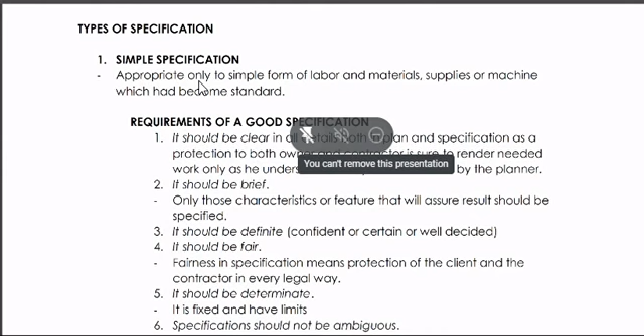Ng iyong foreman or ng contractor mo or ng owner mo. Okay? Next, it should be brief. Okay? Una, it should be clear. Pangalawa, it should be brief. Only those characteristics or features that will assure result should be specified. Hindi yung ang dami mong nilagay, pero iisa lang pala patutunguhan, ang dami mo pang nilagay, ang dami pang pasikot-sikot.

Next, number 3. It should be definite. Confident or certain or well-decided. Hindi yung pabago-bago ka. Like for example, during the process of pre-construction, which is when you say pre-construction, it is under the design. Kapag nasa design process pa lang, and then yung specification mo, nilagay mo doon, I like it white. Nilagay mo doon sa specification mo, white finish wall.

And then, during the construction, iniba mo na naman. It should be gray finish. And then, after tapos na yung project, ay, dapat pala talaga red na lang nilagay ko. So, it should not be like that. It should be definite. You should be confident or certain. Although there are things na nagbabago, but hindi yung to the point na every phase na lang ay nagpapalit ka. Because it takes time.

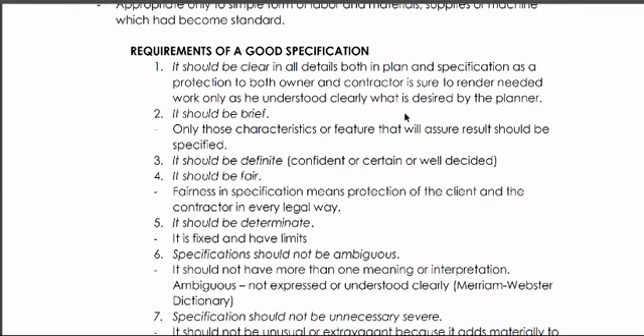specifications should not be ambiguous. Sabihin niyo lang kung medyo mabilis ako or mabilis ako. So, specifications should not be ambiguous. When you say ambiguous, sabi ni Merriam, ambiguous, this is not expressed or understood clearly. And with regards to a specification, it should not have more than one meaning or interpretation.

Like for example, ikaw as an engineer, or ikaw as the site engineer or the designer of the house. If you're familiar with the CAD, yung cloud. So, nakita ko to sa meme sa Facebook wherein yung cloud kasi na yun, there is a specified instruction about that, and nilalagay siya dun sa plan. Ngayon, during the construction, naglagay naman siya ng butas na hugis cloud dun sa building. And that is a no-no.

Dapat pareho kayo or nagkakaroon tayo dapat ng toolbox meeting. Toolbox meeting, ito yung tawag kapag nagmi-meeting, this is inside the construction. Dito sa place natin, hindi siya masyadong ginagawa. Meeting lang, and then sasabihin lang ni contractor or ni engineer kung ano gagawin mo. But in the other areas, pagdating sa Manila, pag yung malalaking building na yung pinatayo, nagkakaroon sila ng toolbox meeting every day.

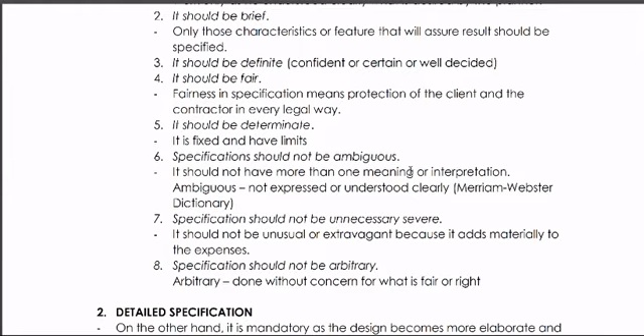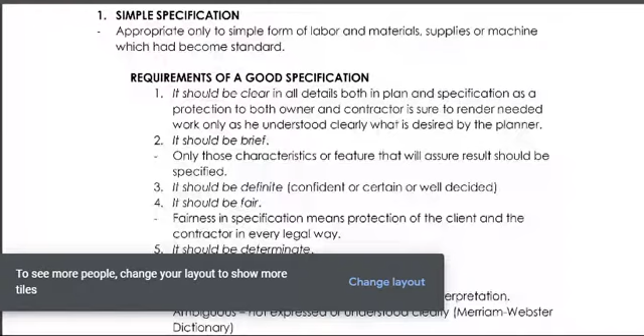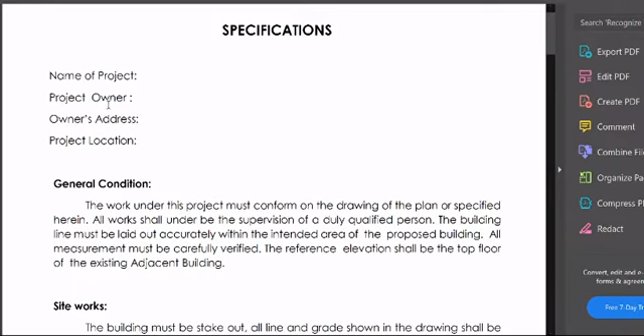I have here an example of simple specification. What is inside the simple specification? Of course, you must have the name of the project, the project owner, the owner's address, and the project location. Ito yung apat na nakalagay sa upper part ng specification mo.

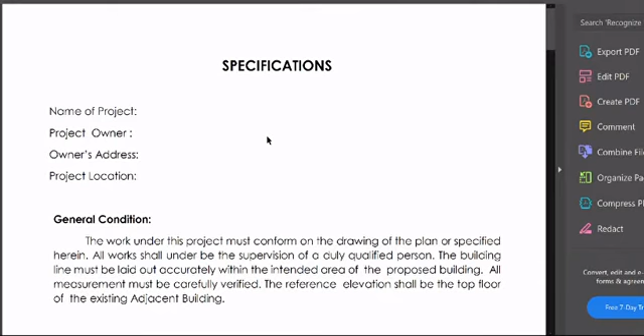Usually, pwede din itong nakalagay sa plano. Okay? But there are some designers who separate it. Okay? Para sa ganun, hindi nawawala. Okay? But there are some na nilalagay na mismo nila sa plano ito, sa gilid.

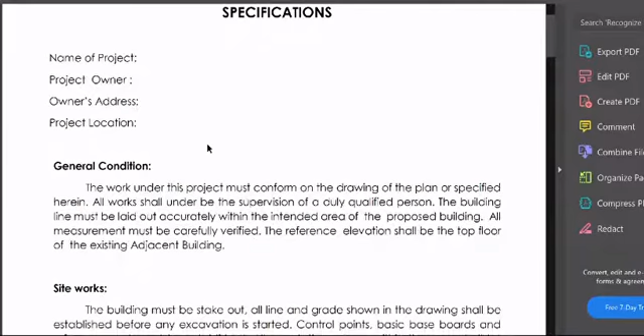Okay? Next, for the general condition, we have here, so ito lang yung mga laman ng simple specification natin, the name of the project, the project owner, the owner's address, and the project location. Number 1 na nakalagay doon, the general condition. When you see the general condition, it is the total or the summary of work done in the project.

Okay? So, for example, the general condition: the work under this project must conform to the drawing of the plan or as specified herein. All work shall be under the supervision of a duly qualified person. The building line must be laid out accurately within the intended area of the proposed building. All measurements must be carefully verified. The reference elevation shall be the top floor of the existing adjacent building.

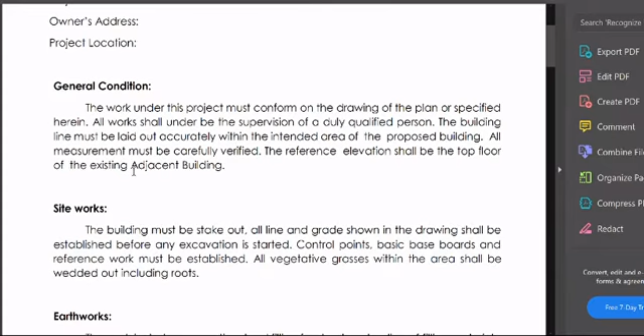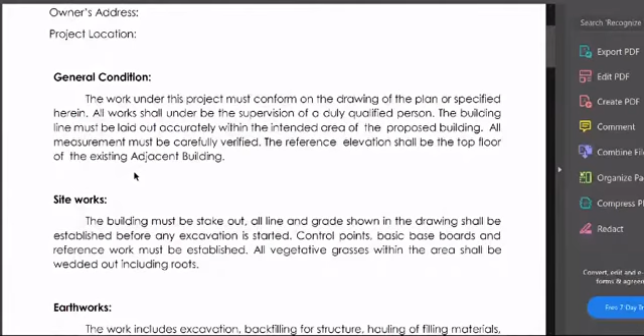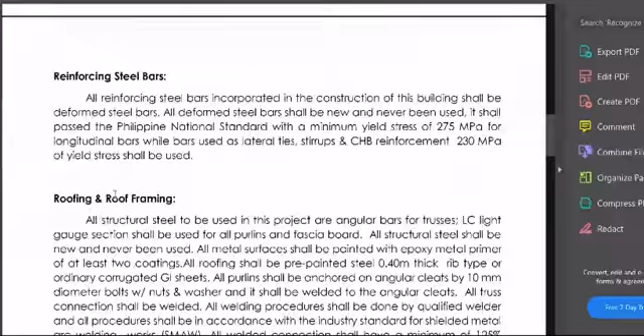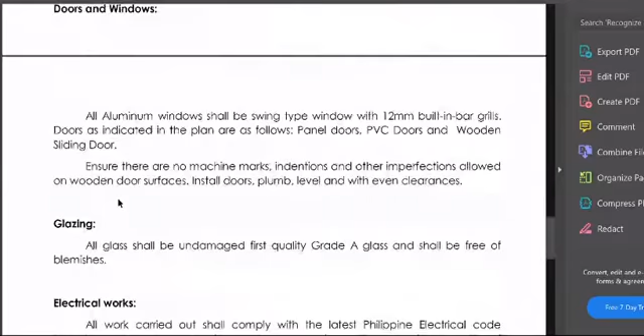Okay? So all in all, when you say general condition, this is the general or the summarized work that you have. And then, after the general condition, dito na yung nahahati. We have the site works, the earthworks, the concrete, okay, the reinforcing steel bars, the roofing and roof framing, the lumber and carpentry works, CHB laying, wall, column, beam, and floor finishes, doors and windows, glazing. When you say glazing, this is the glass, electrical works, and plumbing works.

And then under it, we have the... bakit ko hindi sinave yung aking.

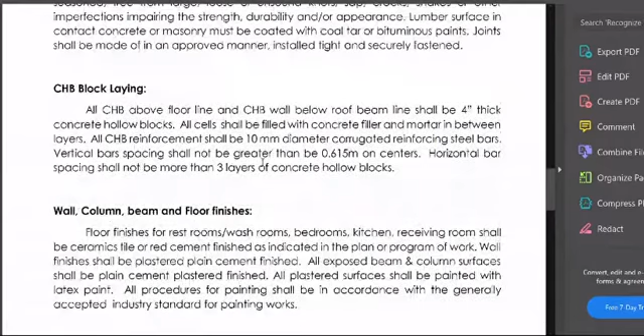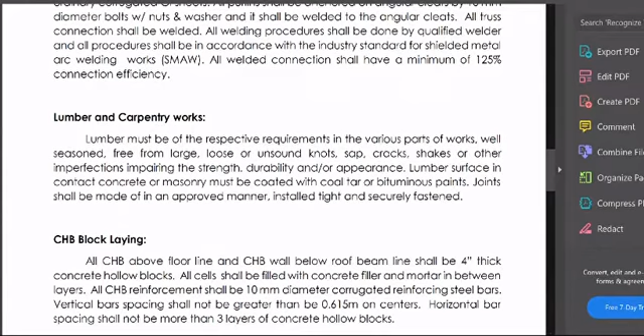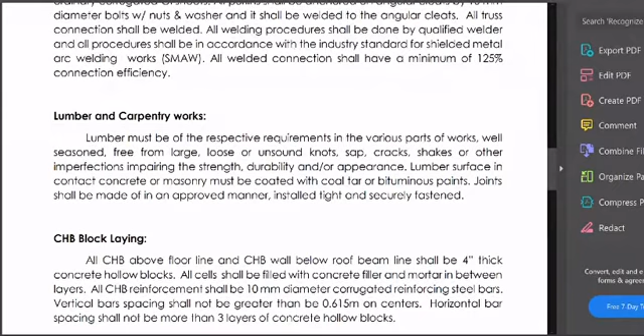Okay? Ano yun? Lag, oo. Yes po, ma'am. Lag ba? Wait lang. Naglalag pa rin ba? Hindi na, ma'am. Hindi na? Okay.

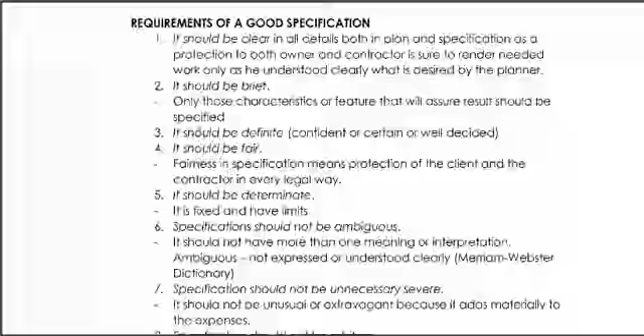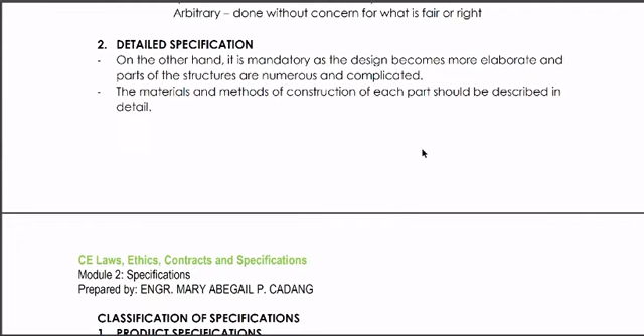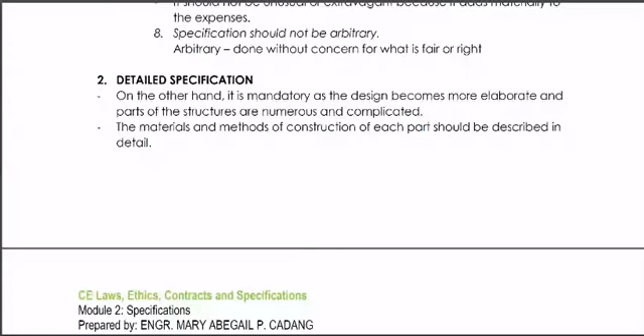So, proceed na tayo sa detailed specification. Okay? For the detailed specification, on the other hand, it is mandatory as the design becomes more elaborate and parts of the structure are numerous and complicated. Okay. Kung kanina, dun sa simple specification, this is more on the simple things that you need to do under the construction. But here in the detailed specification, this is more numerous and for the complicated part.

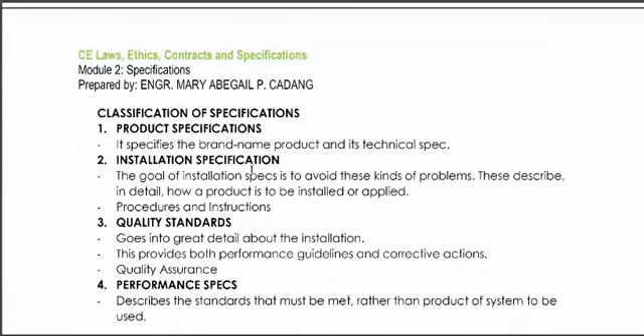Okay? So, ina-apply na siya for 2-story building, 3-story building, and more. And for those smart homes, ganyan. Okay? So, the materials and methods of construction of each part should be described in detail. Kaya nga siya tinawag na detailed specification. Now, for our specification, we have the classification of specifications. Okay? So, what are the classifications of specifications?

Number one, we have the product specifications. So, when you say product specification, it specifies the brand name product and its technical specification. Like for example, okay, the tile adhesive to be used is ABC. Okay, so naglalagay tayo ng mga brand name. Like for example, the cement to be used in the construction will all be... ano na yung mga brand ng semento ngayon? Basta yun. Okay? So, naglalagay tayo ng mga brand name.

Okay? Next, we have the installation specification. The goal of installation specs is to avoid this kind of problem. This describes in detail how a product is to be installed or applied. Installation specification is also the guidelines specification. Okay? This is more on the procedure and instruction specification. What are the things that we need to do on how to install a certain material or a certain part or a certain plan? Okay?

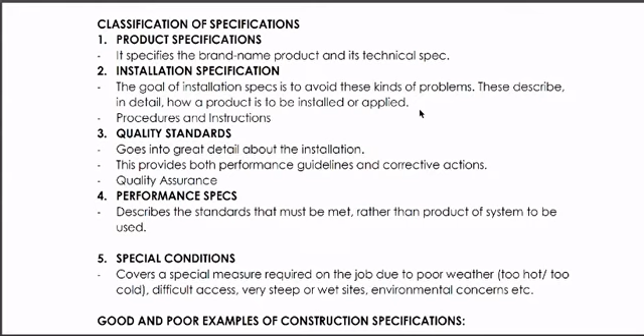Next, we have the quality standards. When you say quality standards, this goes into great detail about the installation. Okay? This is more on quality assurance. In order for us, as the engineer or as the designer, to ensure the quality of our product or our project, we have the quality standards. Like for example, the strength of the concrete is 21 MPa. Okay? So yung mga ganon. Quality standards indicate the strength of the concrete, the strength of the steel, and etc.

Okay? Next, we have the performance specs. When you say performance specs, this describes the standards that must be met rather than the product or system to be used. Okay? From the word itself, performance. What should be the performance of the product? Kumbaga, when you do or apply that certain specification, kung ano yung ini-expect mo na magiging performance nung certain thing or item of work na gagawin mo for that specification.

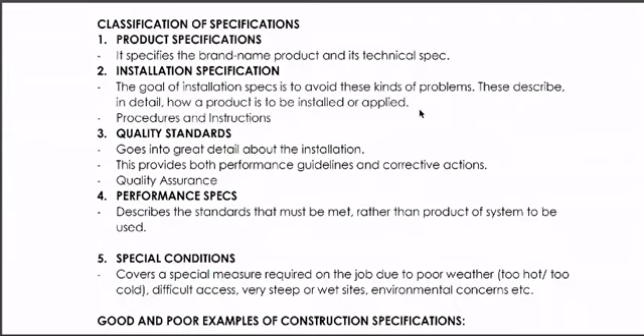Okay? Next, we have the special conditions. For the special conditions specifications, this covers a special measure required on the job due to poor weather. Whether it's too hot, too cold, difficult access, very steep sites, or wet sites, environmental concerns, etc. Pag sinabi mong special conditions, okay, this indicates about the weather. So, kumbaga, it gives us the special condition specification. This solves the problems.

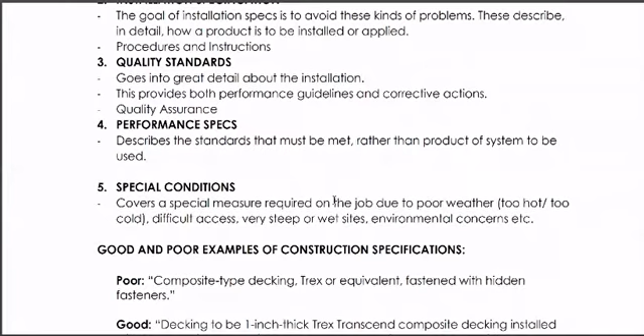So, like for example, merong condition dun sa site na hindi inaasahan. Like for example, yung pagtatayuan mo ng building mo ay dating wetlands. Kapag sinabi mong wetlands kasi, continuous yung water flow doon. When you say special condition specification, ano yung mga ipapaloob doon? Like for example, nasa wetland yung pagtatayuan ng building mo. For the special condition, we will use waterproofing for the foundation. So that is under the special condition specification.

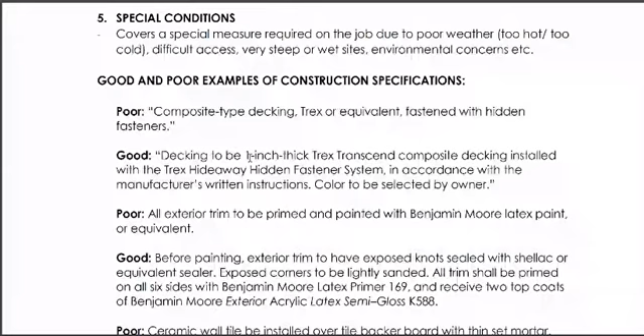Okay, now we have here the good and the bad or the poor examples of construction specifications. Example number 1. A poor construction specification goes like this: Composite type decking, Trex or equivalent, fastened with hidden fasteners. What is that? What do you mean composite type decking? What do you mean Trex or equivalent? What do you mean fastened with hidden fasteners? That is a poor type of construction specification because the guidelines or the instruction is not clear.

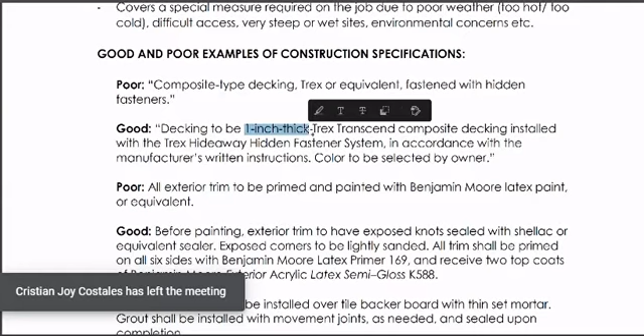But if we're going to rewrite it in a good construction specification, it goes like this: Decking to be 1-inch thick Trex Transcend composite decking installed with the Trex Hideaway hidden fastener system in accordance with the manufacturer's written instructions, color to be selected by the owner. Why is it under the good construction specification? Because as you can read, meron tayong number, meron kang color na makikita, meron kang instruction na makikita. So that indicates that your construction specification is good.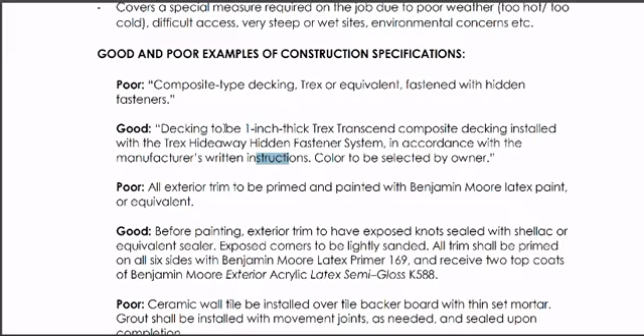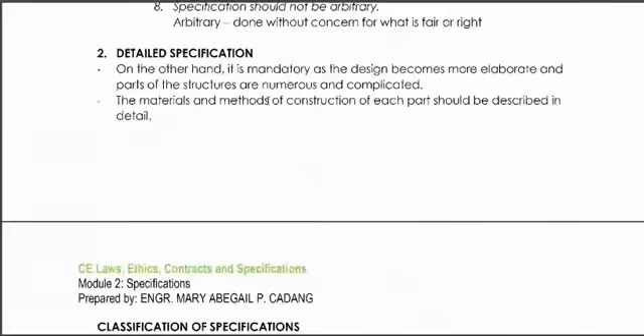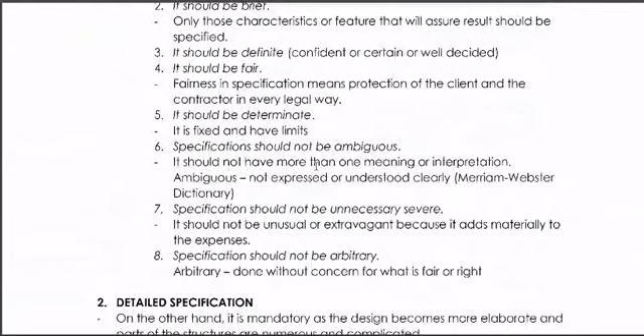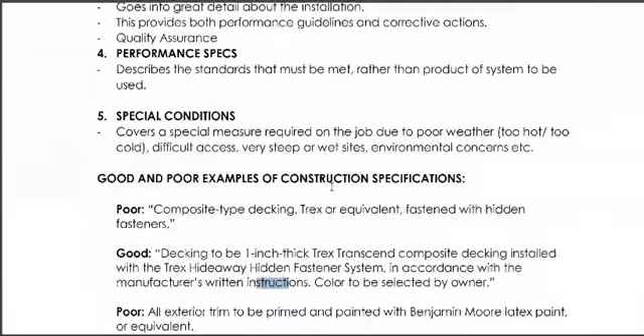Why? Because it is clear. It is, ano na tawag doon? Ano na yung una kanina? Clear. It is clear. It is brief. It is definite, fair, not ambiguous, and not unnecessarily severe, and not arbitrary. So that is the example of a poor and good construction specification. Sa mga iba, you just need to read na lang para mabilis tayo.

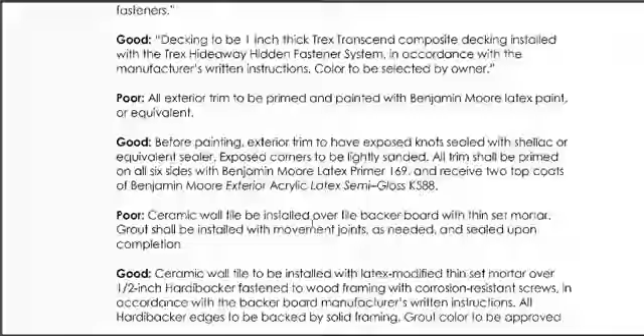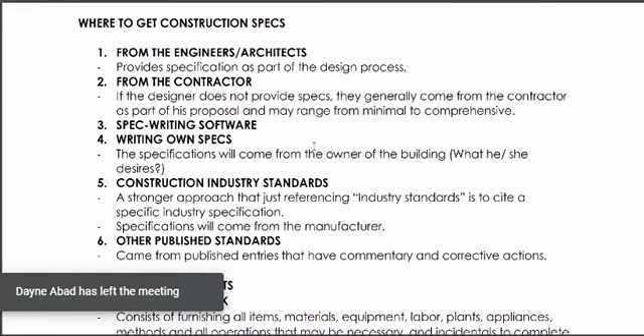Now, where to get construction specifications? Later on na lang yung sample natin for the detailed specifications. Number 1, of course, from the designer or from the engineer or architects. Why? Because they provide a specification as part of the design process. Una, syempre, kailangan galing siya kay designer. Hindi galing kay kapitbahay, hindi galing kay friendship, hindi galing kay internet. Dapat lagi kay designer, who is the engineer and the architect. Siya yung nakakaalam kung paano at anong gagawin sa project or dun sa plano.

Next, from the contractor, of course. But take note, if the designer does not provide specs, they generally come from the contractor as part of his proposal, ranging from minimal to comprehensive. Take note, class, the specification should always be from the designer or the engineers. Meron man tayong listahan dito kung saan natin pwedeng kunin yung specification, but the major source of specification should always be the designer. Like kay contractor, he or she can provide a specification, but it is for proposal only, and it should be approved by the designer.

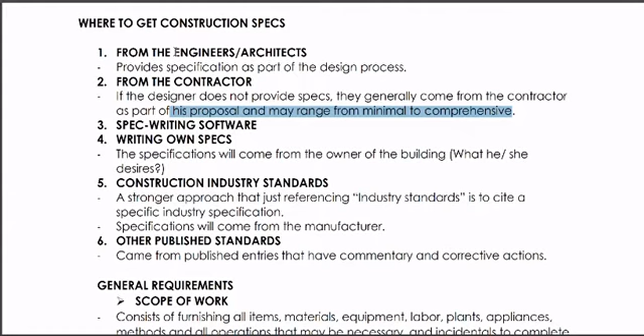So take note, the major specification should always come from the major specs source, who is the engineer or architect or the designer. Pwede mang magbigay si contractor, but still it is just a proposal, and dapat i-approve ni engineer or ni architect or the designer. Next, spec writing software. Meron tayong mga app or software na ginagamit in the construction industry for specification writing. But those things are still from the engineers and architects.

And it should always be approved by the engineers and architects. Usually, itong mga spec writing software na to, madalang naman siyang ginagamit sa atin. Pero, siguro sa mga first world country, or like for example, sa Dubai, okay? So, gumagamit sila nito. Or maybe sa Manila din, okay?

But, as an experienced engineer, I never had an experience regarding this spec writing software. Okay, so I have no knowledge about it, but I assure you that spec writing software gives also specification, but should always be approved by the designer.

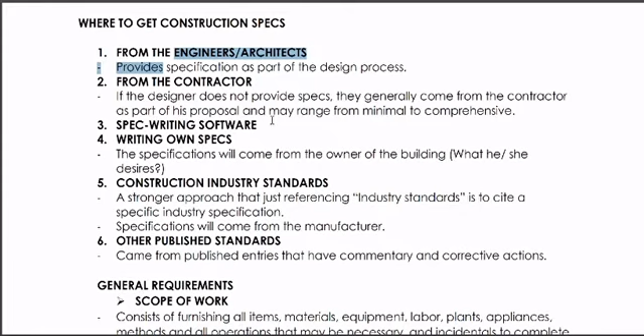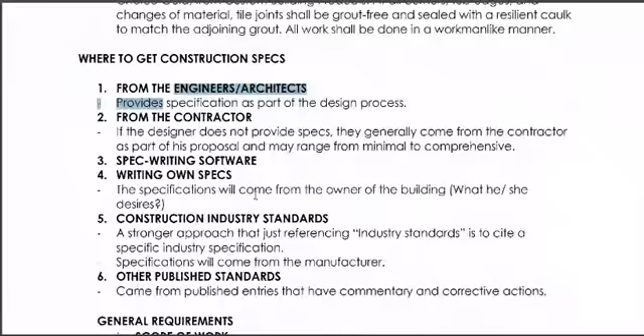Okay, next, we have the general requirements. So ito na yung mga laman ng ating detailed specification. Number 1, we have the general requirements. For the general requirements, this contains the scope of works. Kapag sinabi mong scope of works, this consists of furnishing all items, materials, equipment, labor, plants, appliances, methods, and all operations that may be necessary and incidentals to complete excavation, filling, backfilling, and grading in accordance with the plans and schedule if any, and subject to the terms and conditions of the contract.

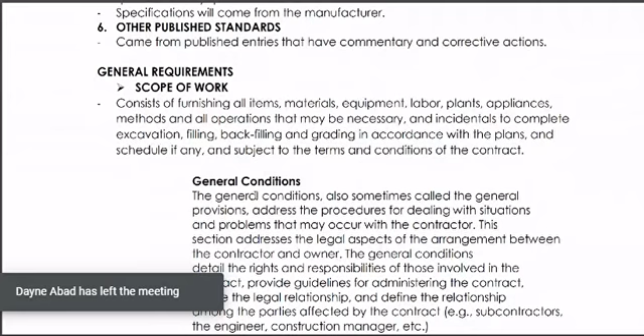What's within the scope of work? It contains the guidelines, what are the things to do, what are the description of works, and lastly, this also contains the contract. On how many days that you're going to construct. Take note, class, another information. In the construction industry, magkaiba ang calendar days at working days. When you say calendar days, it pertains from Monday to Sunday. That's straight week. We call that calendar days.

So, pag sa mga contract, later on, kapag nag-OJT na kayo, malalaman nyo yun. So, kapag sinabing calendar days, ibig sabihin non-stop yan. With or without weekends, with or without holidays, hindi kino-consider. Pag sinabi mo calendar days, that pertains from Monday to Sunday. Ibig sabihin straight week kang nagtatrabaho, umaga man o gabi.

Pag sinabi mo namang working days, that is from Monday to Friday, or Monday to Saturday. So, later on, pag naging engineer na kayo, tapos nag-review kayo ng mga contracts nyo, this is the timeline of the project within 24 calendar days. Pag sinabi niyan 24 calendar days, ibig sabihin straight yon, kahit na may natamaan na holiday or what, it is not considered.

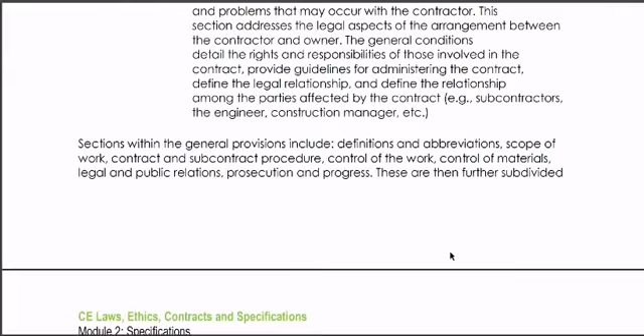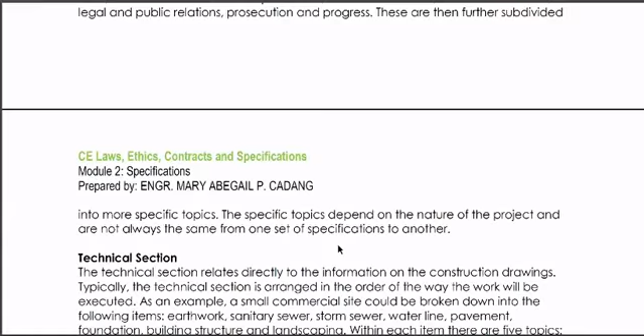Sections within the general provision include the definition and abbreviations, scope, subcontract procedure, control of the work, control of the materials, legal and public relations, prosecution and progress. These are further subdivided into more specific topics. The specific topics depend on the nature of the project and are not always the same from one set of specification to another. Okay? Now, we have the general condition, the scope of work.

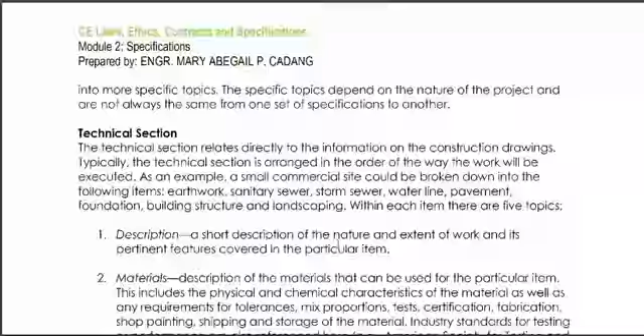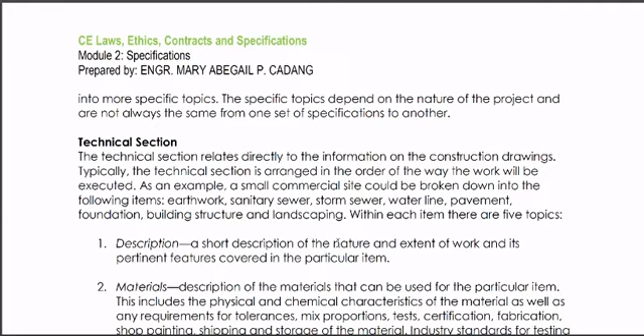Next, we have the... kung kanina dun sa general provision, this contains the summary, the item of works, the contracts, the guidelines, the conditions, the rules and regulation under the construction. Here in the technical section, this gives us the description or the detailed specification for every item of work. And what are the things na makikita mo every item of work?

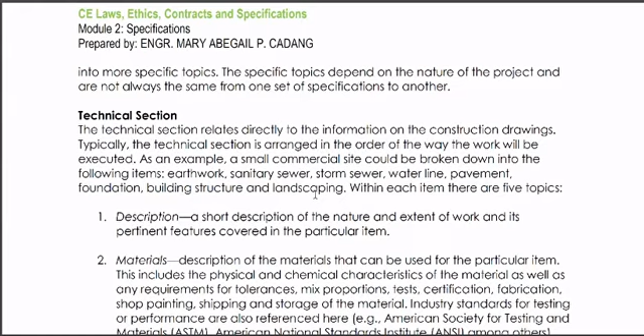The technical section relates directly to the information on the construction drawings. Typically, the technical section is arranged in order of the way the work will be executed. As an example, a small commercial site could be broken down into the following items. We have the earthwork, sanitary sewer, storm sewer, water line, pavement foundation, building structure, and landscaping. Within each item, there are 5 topics. So, take note, each item.

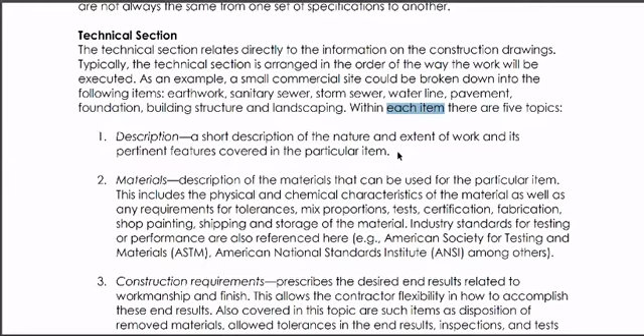Pag sinabi mo each item, that means every item of work. Like for example, structural excavation, structural concrete works, steel reinforcement works, ganyan. And ano yung nakapaloob doon? For the specification, dapat meron kang description. Description, this is a short description of the nature and extent of work and its pertinent features covered in the particular item. Like for example, item 101, or item 111. Item 111, what is the description? Project work description. It is structural excavation. Ganyan.

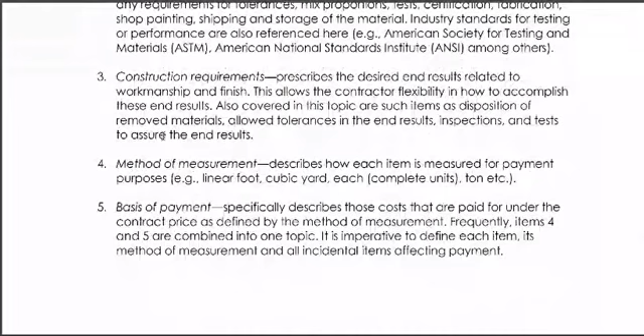Next, for that certain work, of course, what are the materials needed? Next, what are the construction requirements? What are the methods of measurement? So, alam niyo naman na siguro yung mga yan. And, lastly, what is the basis of payment? Pag sinabi mong basis of payment, this specifically describes those costs that are paid for under the contract price as defined by the method of measurement.

Pagdating sa basis of payment kasi, the basis of payment for construction ay hindi per kung ilang material yung nabayaran ay yung nagamit mo or ilan yung tao mo at that day, but the basis of payment under the construction industry is how much materials or how much work that you put or how much effort that you put on that project.

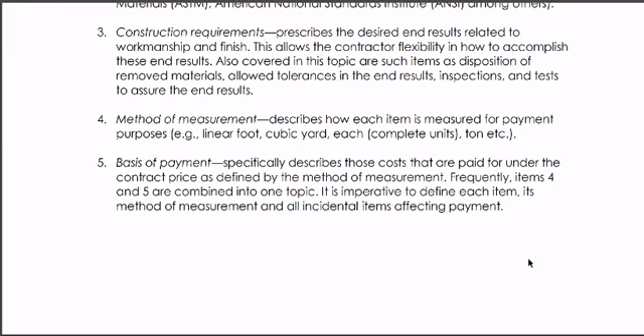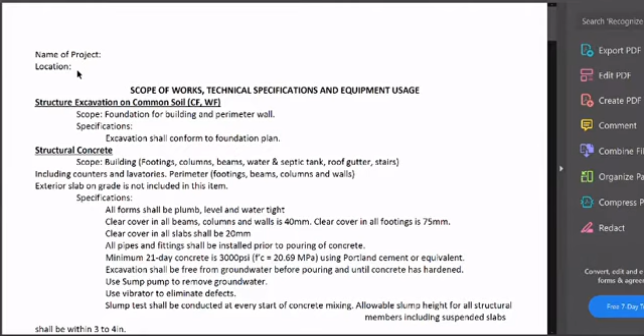So, this is an example of a detailed specification. Of course, we have the name of the project and the location. Meron din, may hindi pa ako naisali dyan, yung project owner and the title of the project and etc. Lahat ng mga personal information nakalagay lagi sa taas. Next. Ito na. Scope of works, technical specifications, and equipment usage.

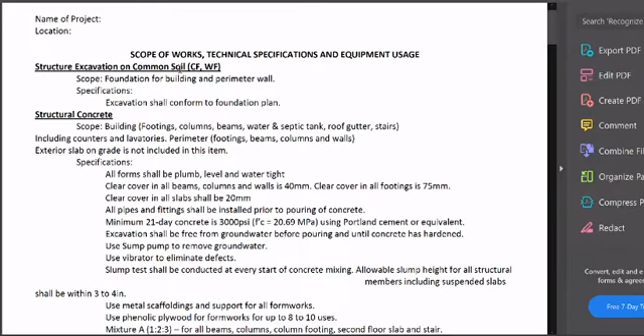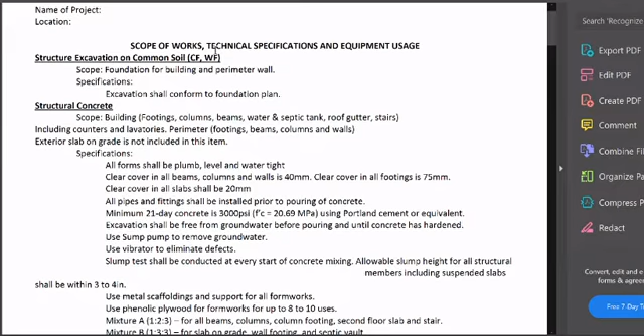So, for the structure excavation, ito na yung sinasabi ko na we have the technical specification. For the technical specification, kung mapapansin mo, every item, meron kang scope of work. Like for example, structure excavation on common soil, CF or WF. Ang ibig sabihin ng CF, column footing or wall footing. Ganyan. Next, under the item of work, we have the scope of work.

For the scope of work, like for example, foundations for building and perimeter wall. Ano daw yung scope of work, ano daw yung gagawin? Foundation. Magbubungkal ng foundation. What is the specification? What is the guideline? Excavation shall conform to the foundation plan. So, yung scope of work, foundation for the building and perimeter wall, yun yung scope of work. The specification, yung instruction, anong gagawin.

Okay, so for example, in the area, the specification is excavation of all, it shall conform to the foundation. Ibig sabihin, magbubungkal ng lupa na nakabase doon sa ating foundation plan.

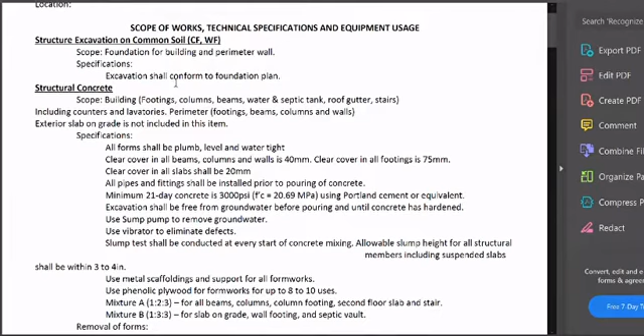Next, valid ba to as detailed specification? Yes, because it is clear, and it is specified.

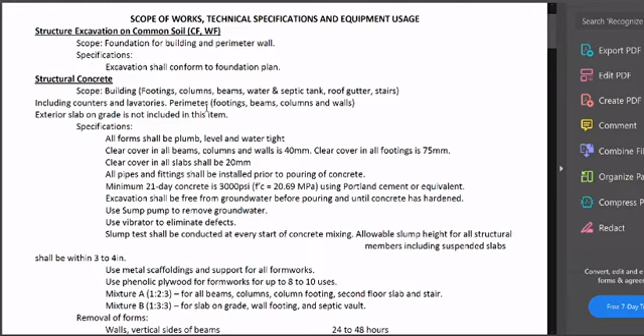Okay, next, structural concrete. Again, scope of work. What are the scope of work? For the building, we have the footings, columns, beams, water, septic tank, roof gutter, stairs. Ano yung mga bagay na gagawin? Okay, including counters and lavatories, perimeter, footings, beams, etc.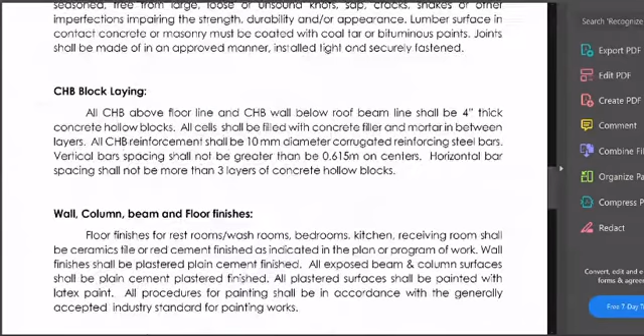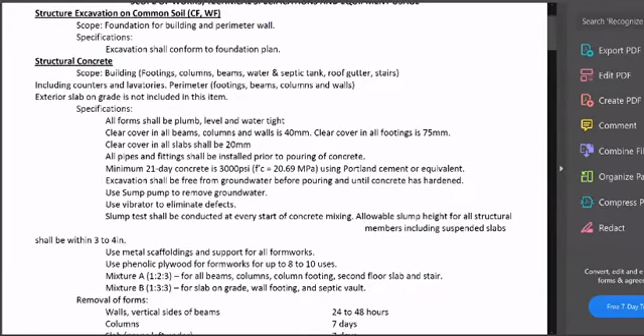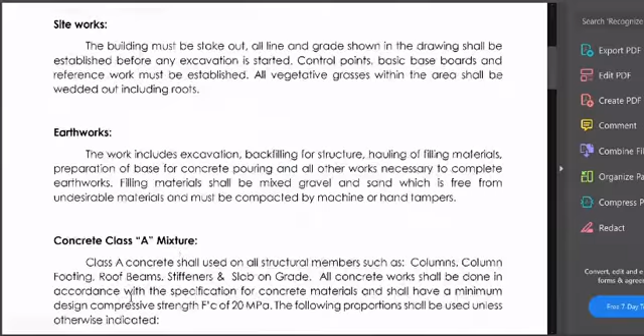Okay, now what is the specification or what are the specifications? Dito na nakalagay. Kung papansin niyo, okay, dun sa ating malaking pagkakaiba niya dun sa simple specification natin. Why? Because, as you can see, it is worded and it is, kumbaga, in a general form. Unlike in the detailed specification, we have the details, the tiniest detail that you have in the construction. Like for example, in the structural concrete, sa simple specification, nakalagay lang doon yung gagawin. So this is more on general term.

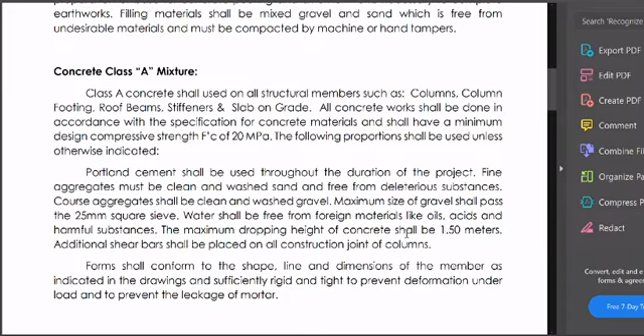Concrete class A mixture. Class A concrete shall blah blah blah. Materials, a minimum design compressive strength FC is equal to 20 MPa, blah blah blah. Maximum dropping, ganyan lang meron siya. But in the detailed specification, lahat nakalagay. This is more detailed.

Like for example, specifications: all forms shall be plumb, level, and watertight. Clear cover in all beams, columns, and walls is 40 mm. Clear cover in footings is 75 mm. You can see the difference - there is more detailed, more clear instruction. You have the numbers, the dimensions, the areas, etc.

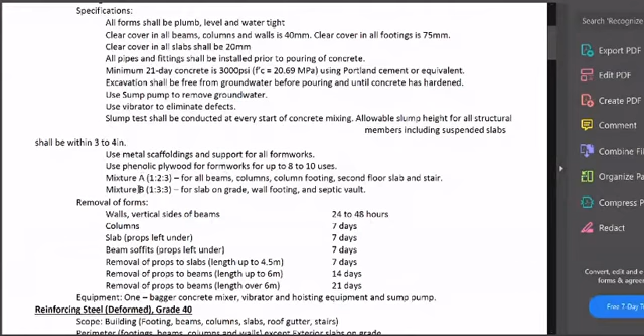Next, clear cover in all slab shall be 20 mm. All pipes and fittings shall be installed prior to pouring of concrete. Minimum 21-day concrete strength is 3,000 PSI using Portland cement. Then meron pa dito, use metal scaffoldings - ano yung mga gagamitin mo? This is more detailed.

And then even the removal of forms, ano yung instruction? So kapag wall yan, or kapag vertical side of beams yan, yung mga forms natin, 24 to 48 hours, pwede mo nang baklasin yung forma mo. Pag columns naman, dapat within 7 days - dapat palipasin mo muna ng 7 days bago mo tanggalin yung forma mo. And also, for the removal of props to beams, length up to 6 meters, after 14 days bago mo siya tanggalin. And length over 6 meters, after 21 days bago mo siyang tanggalin.

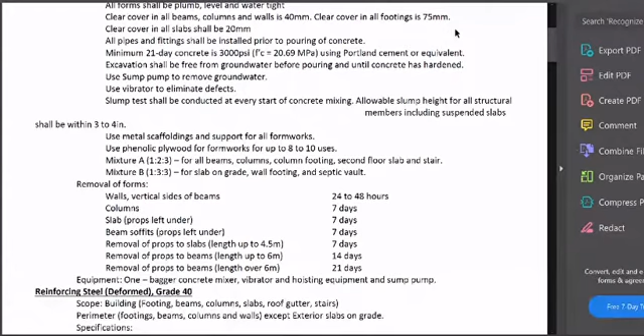And take note, there are limits. Diba sabi natin kanina, there should be limits. So this is a good example of a proper specification or construction specification.

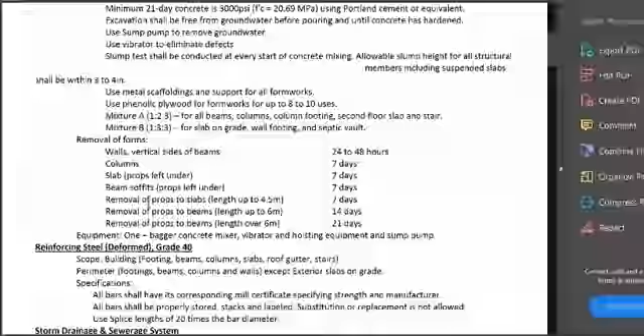Next, like for example, in the reinforcing steel, nakalagay din dito, bakit deformed? So, reinforcing steel - meron kasi tayong iba't ibang klase ng reinforcing steel. We have the plain and we have the deformed. Pag plain yan, yun yung walang corrugated. And take note, kapag hindi corrugated yung steel reinforcement natin, hindi kakapit yung semento.

That is why we use deformed. Pag sinabi mong deformed, this is the corrugated steel bar or the reinforcing steel bar. Again, nakalagay din dito ang grade. Meron tayong grade 33, meron tayong grade 40, meron tayong grade 60. So sinasabi niya dito, naglalagay tayo ng anong grade.

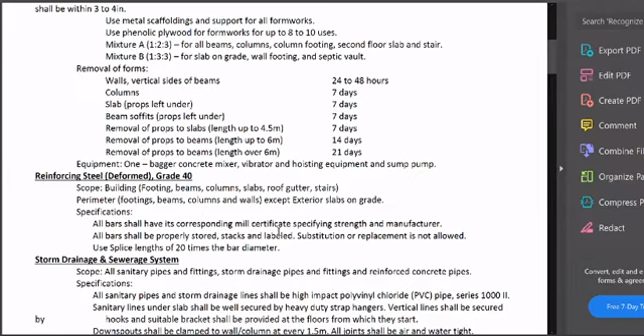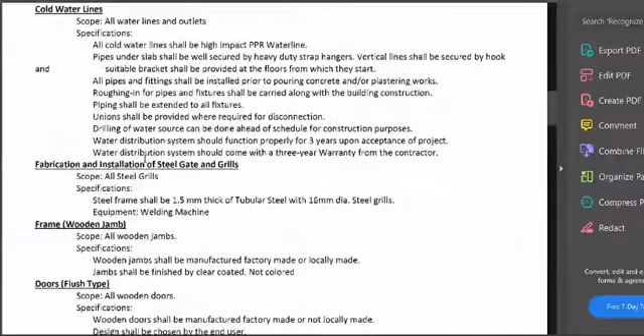Then we have how to install the storm drainage, etc. And that is how to do or how to make or prepare your

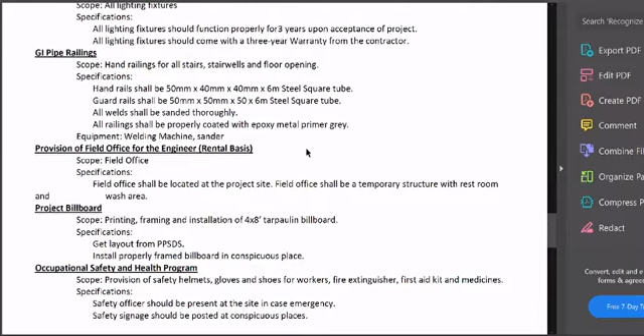detailed specifications. Take note, dun sa detailed specification natin, dito din nakalagay yung provision of field office, if it is rental basis. Of course, every project should have a project billboard. Occupational safety and health.

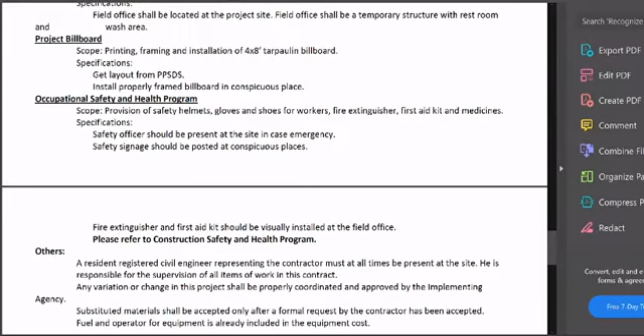Nakuha niyo na ba ang COSH? May I know - may subject na ba kayong COSH? Hindi ma'am, kasi nung mag-enroll ng course biglang nag-pandemic naman. Okay, so ayun.

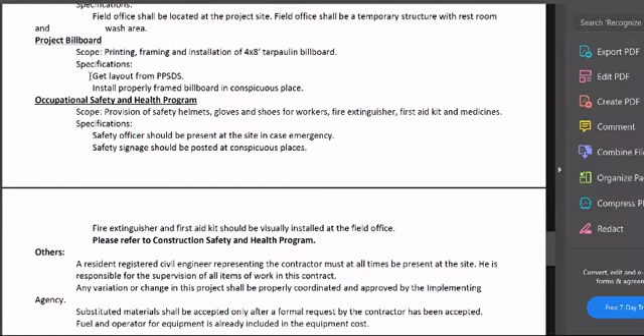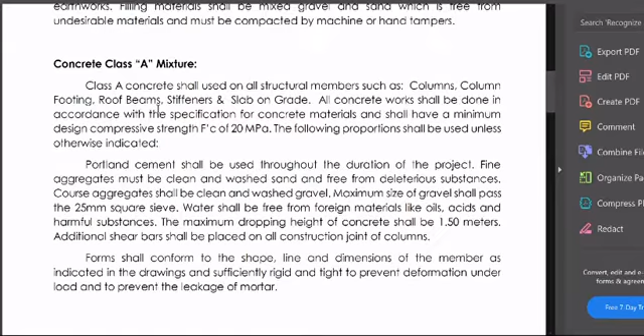Kung wala pa, okay. And then, the last part, meron tayong prepared by. Hindi ko na nilagay, pero ganito din lang yon - prepared by the engineer or the designer, and then the other eligibility or license that they have.